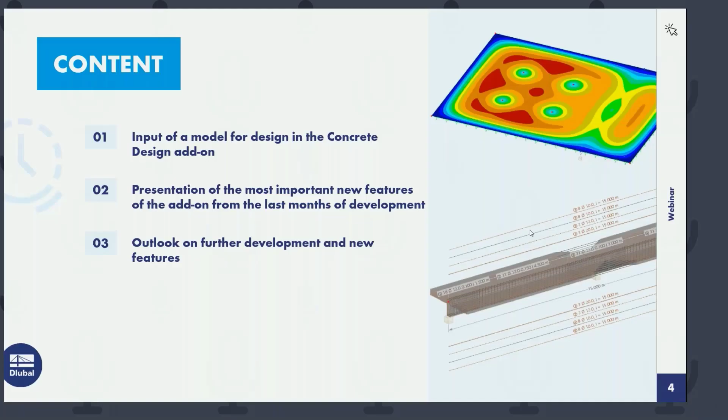Okay, thanks Andreas for the introduction. I will start with a short overview about the content of today's presentation. As I already mentioned, I will show you today new features in our concrete design add-on. Therefore, I will create a small structure in RFEM 6, and during the modeling process, I will tell you about all the new features we now have in our concrete design add-on.

Just a short overview about these new features. Mainly it's the automatic function for surface reinforcement. Then we have also a new function regarding determination of required reinforcement for members, which now also includes the serviceability limit state design. Then I will show you how to design with member representatives. We have also a new multi-edit option in the edit member dialog for members and member sets. If we have entered a reinforcement and we have a certain reinforcement layout inside our member, then we have a new function for printing graphics of this reinforcement template or proposal into the printout report. I will show this to you as well. And I will show you how to activate the design check for the shear joint in the add-on.

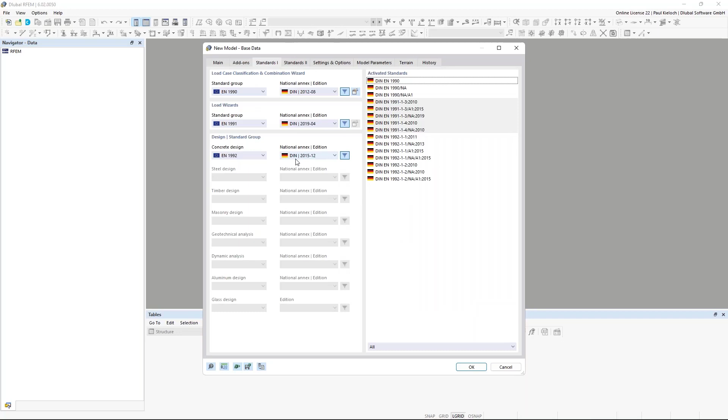Okay, with that said, I would switch directly to RFEM 6. As I mentioned before, I will start with creating a new model. I'm opening a new model file, and what I would like to do today is start with a template. That has the benefit that there are some settings already stored in the template, and also add-ons can be activated, or I could predefine some national annexes and so on. So this is already set in this template, and I will give it the name 'webinar', and maybe 'English' so that's the English one. And I start this file here.

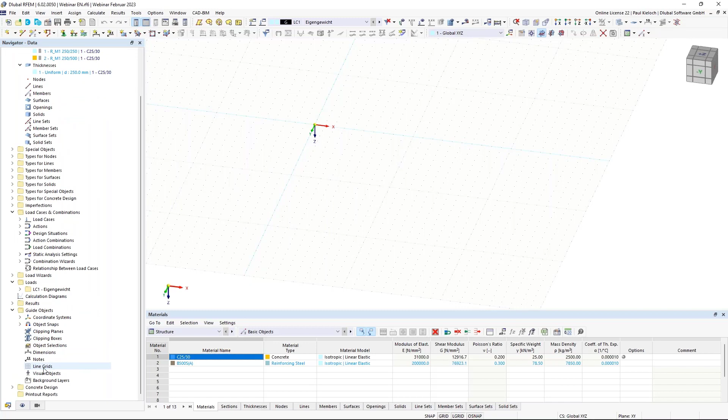As mentioned, due to the fact that I've used these templates, I have a certain amount of materials, sections, thicknesses, and so on, and I will use them today for this presentation. So first, I'm switching to these guide objects, and there I will create a new line grid.

I will also show you today the labels and the dimensions. Switching here to enter the dimensions in X direction: 5 meters and 4 spans. So it looks like this. And in Y direction, the first span is 5 meters, then 2.5 meters and 2 spans, and the last one is again 5 meters. So this is my line grid, which I would like to use today.

It looks like this, and on this line grid I will create my slab, beams, columns and so on. So I can switch off the grid in the background, and then it's a little cleaner if you just see the line grids.

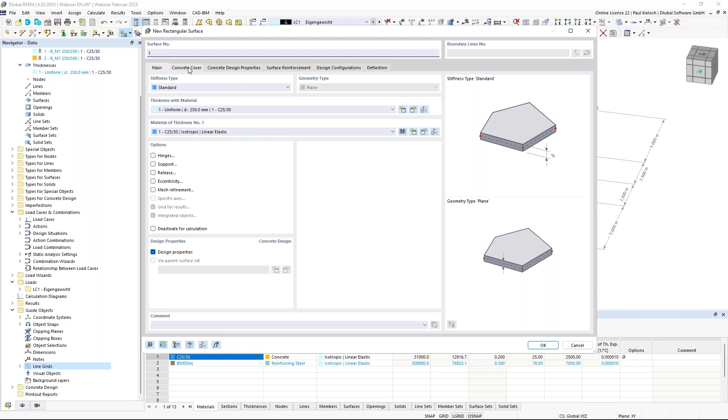The first topic is entering a surface for design. So I'm creating a concrete surface with a thickness of 250 millimeters, and before entering this surface, I can directly set the design properties for this slab. The concrete cover and the concrete durability class, I leave as default here in this example, XC1.

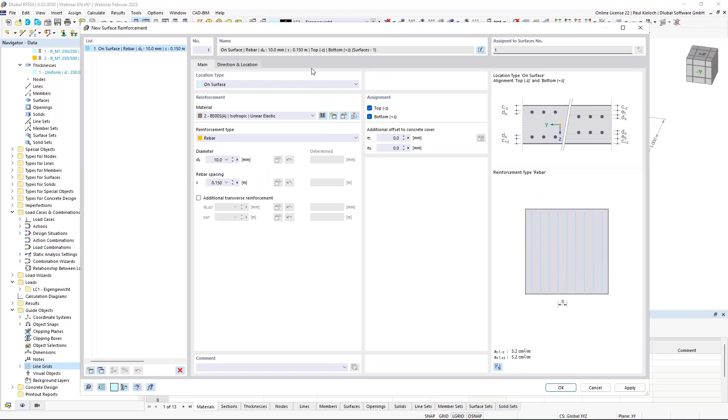The reinforcement direction is also default, and I will assign a basic reinforcement for the whole slab with a diameter of 10 millimeters and a spacing of 15 centimeters in both directions.

You see here already some changes in this dialog, and I will come back to these changes and modifications in this latest version of RFEM 6 later, after the first calculation. Okay, I can confirm this.

The design configurations I leave also by default for this first attempt, and I will come back later to these design configurations.

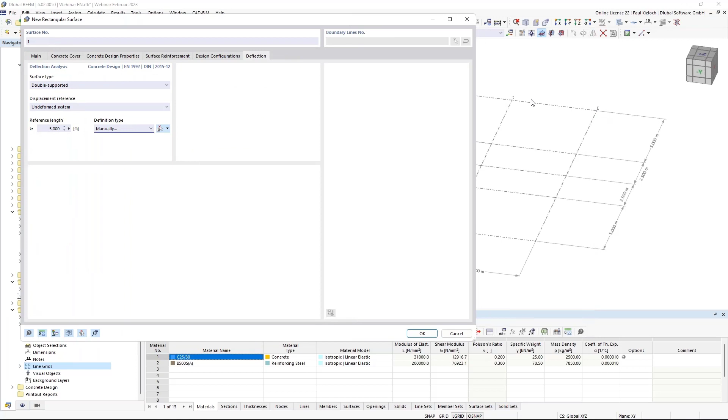The last thing I'm changing here is the reference length for the deflection analysis. So I switch this to manual, and the reference length is now set to 5 meters in X and Y direction. Confirm this OK, and then I create my slab.

By default, you see the rendering of the assigned reinforcement mesh, and what's new now in RFEM in the latest version is the description of the assigned reinforcement.

In the latest version we changed it a little. In the previous versions there was a small arrow downwards or upwards: if downwards, it was reinforcement on the bottom side, if upwards, on the top side of the slab. That was changed a bit, and now it's just a small line next to the text on the downside or upper side. So it's a small change here.

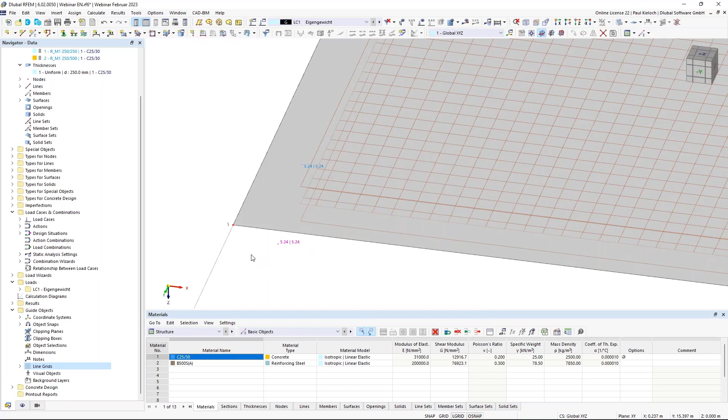What I would like to change here is the number of decimal places for this example. Now I'm switching off this reinforcement just to have a cleaner look on the structure.

The next topic is that I would like to enter a beam, or a rib member, in this axis D. Therefore I create a new member, switch the type to rib, and assign this eccentric cross-section on the positive Z side of the surface, which is the default setting. The used section should be this 250 by 500 millimeter section.

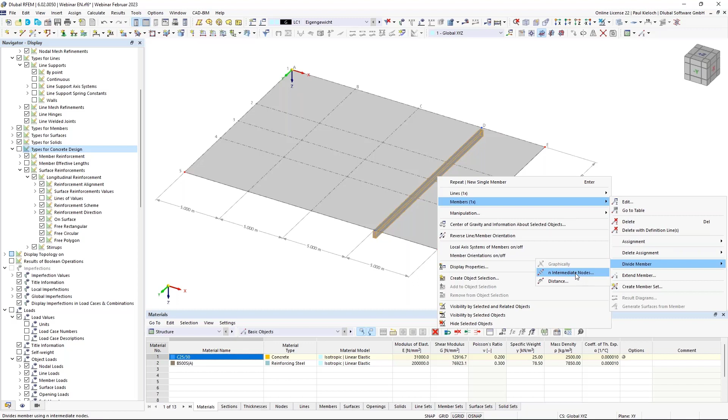Can confirm that is okay, and then I will assign this rib in this axis. And here in axis 3, in the middle of the beam, I would like to support this beam with a column, and therefore I'm dividing this member by one intermediate node.

But what's new in RFEM 6 is that we can use this node type 'on member', which has the benefit that our member is not divided into two parts, making it a little easier for definition of reinforcement and so on. So I will create a new node just with the type on member, without dividing the member.

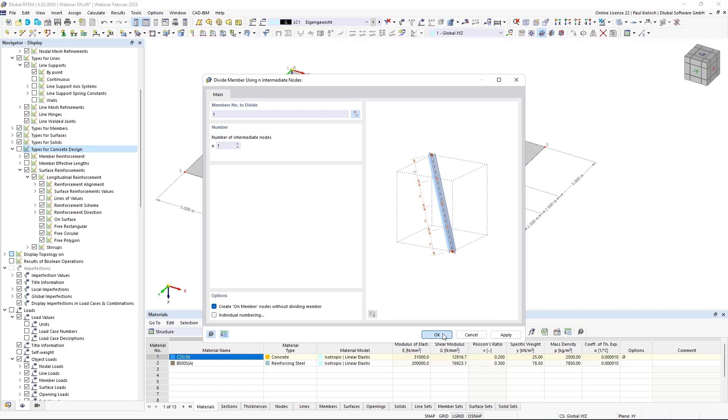You see here in the middle of the beam a blue, light blue node, and that's the new type for dividing members. The next step I would like to do is entering nodes for the column heads, so they are placed here in these points.

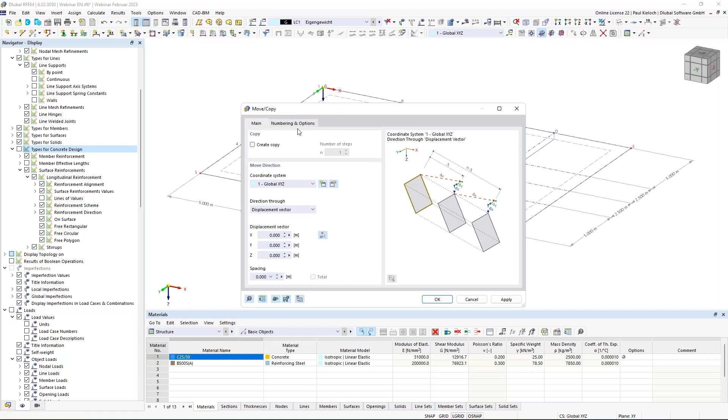Okay, and now I'm switching to the wireframe display model, and I can select these 5 nodes here, and then I will copy them with 3 meters in Z direction, and I can link these steps here and enter automatically a new member. Therefore, I will create a template.

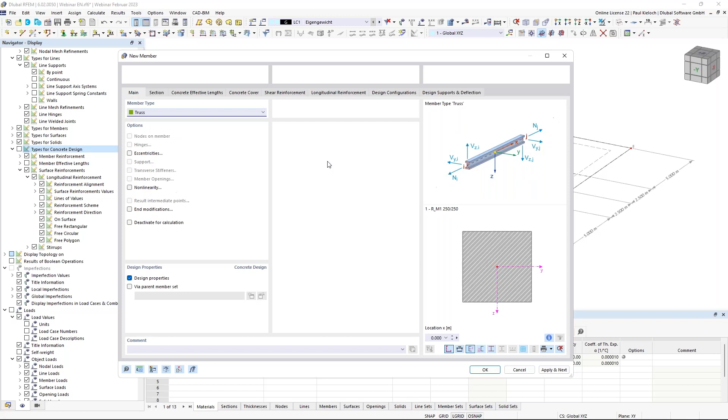The columns should be hinged at the top end and the bottom end, so I'm switching here the member type to truss. The section is pre-selected in this case, like I would like also to use it, with 250 by 250 millimeters. And I can now go through all the settings, all these design properties here, and entering, for example, the buckling lengths for the stability analysis. In my example, it's a braced system, and I would like to use these effective length factors of 1 in both directions.

Next step would be the concrete covering. I leave it here in this example like it is. Regarding the shear force, I would like to use shear links with a thickness or diameter of 10 millimeters and a spacing of 15 centimeters. And the longitudinal reinforcement should be uniform surrounding, 4 rebars and a diameter of 20 millimeters.

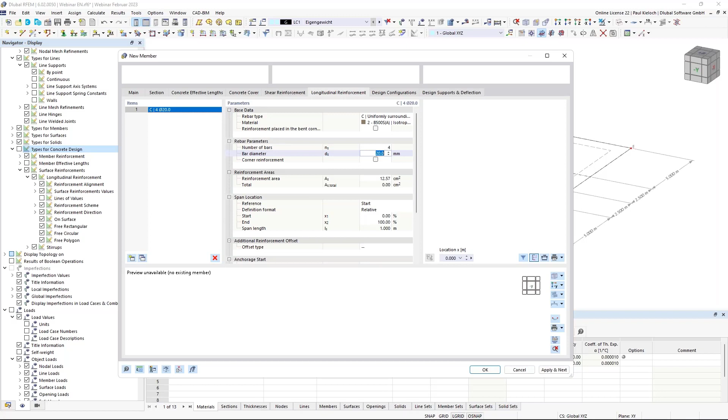Design configuration and design supports are not required to change here in this case, so I can confirm this. And then I'm using the template to create my columns, and they would look like this.

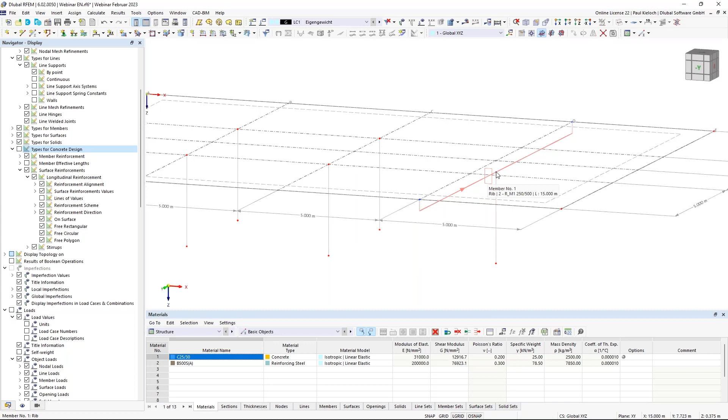I have just to take care because this node is here in the center of this eccentric beam, so the nodes at the bottom end are not in the same height. I will just do a double click here on this node and switch this to 3 meters, and then we have the same level here.

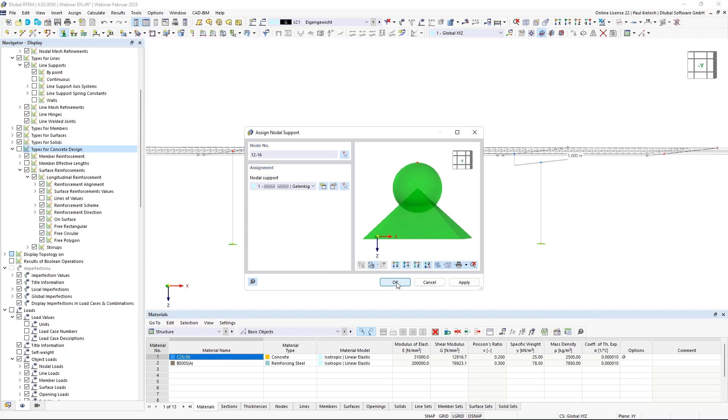Okay, then I can create the supports for these columns due to the fact that I have hinged member ends by this member type. I can create a new nodal support, and this is fixed or rigid in all directions. That would look like this in this example.

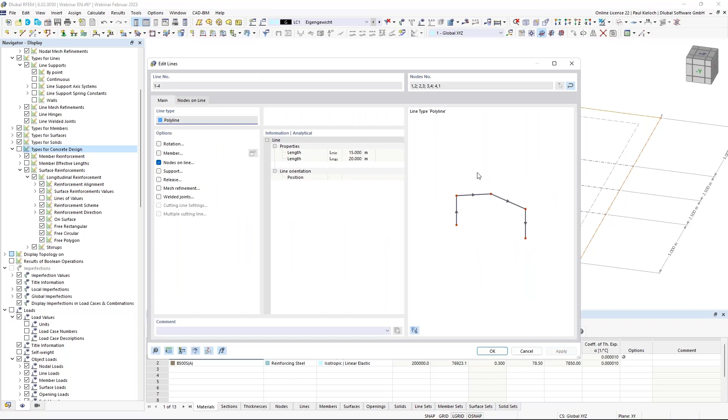Okay, then the next topic would be entering the support at the edge of the slab. So there I would like to consider walls. Therefore, we have also an option in RFEM 6, so I can select all the lines at the edge of the slab, opening them with a double click, and I will assign there a support, create a new one for them, and this one will be changed to local. And as soon as I switch this to local, I'm getting here a new option, stiffness via fictive wall.

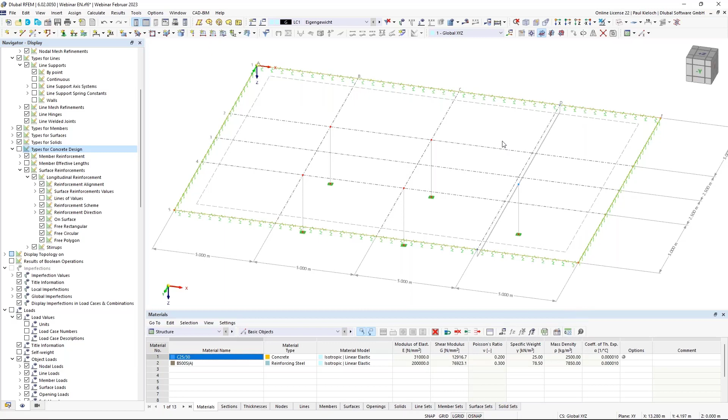And the wall thickness should be 25 centimeters and a height of 3 meters, and it is hinged at the wall head and base. So that's okay for me, I can confirm this. And then I have also the lines on the edge of the slab supported.

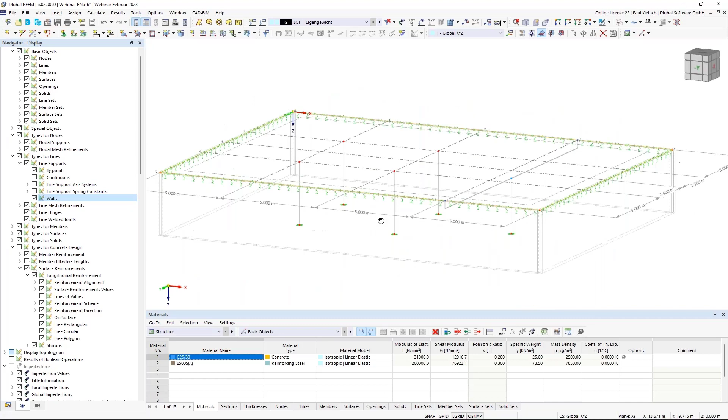If I would like to check this graphically in my system, then I can switch to the view or display navigator. And there under the line supports, I have the option to activate the walls, and then I would see the system also with this fictive walls here.

That is basically my system now. What I have not defined yet is the settings regarding the rib. Therefore, I'm opening the rib member once again, and I switch to this tab here with the rib.

And in this table, you can basically assign the segment length for the determination of the effective width for the ribs. I will not go too much into detail for this part. We have shown this in our first webinar regarding concrete design in November 2021, and it's also part of the Eurocode 2 training where we get more into detail regarding this table.

I will just enter the values here to have a realistic effective width for this example. I'm using here this approach according to Eurocode 2, so I'm setting the segments here, user defined. It's the same on the other side. Basically, I have to do this because I'm using one member which is supported in the middle, and therefore the program needs the reference length.

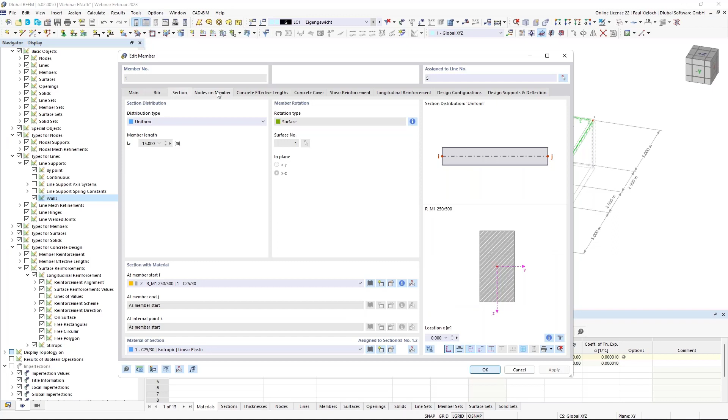So next is the section tab. There I do not have to do any changes, this is okay so far. Concrete covering also, so I can directly switch to the shear reinforcement.

I would like to use here shear links, stirrups with a diameter of 10 millimeters and a spacing of 0.15 meters. And I will not use this for the whole length of the member, but I would like to have a span in the middle of the beam where I have 10 centimeter spacing between the stirrups. So therefore I'm creating new spans.

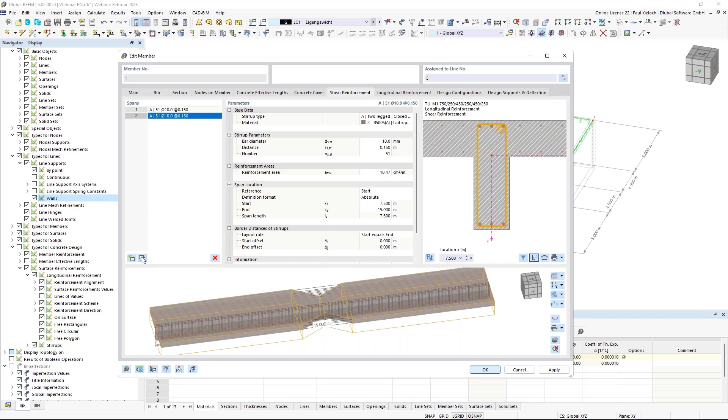I first switch here to absolute for the definition of the span length. Then I just click two times on this button, and then I'm getting here this spans. If I zoom in a little bit, then you see that here this middle span is now a little bit displaced and not in the middle of the member.

And I can change this here to 6 meters, and in the second X location to 9 meters in my example. And then the span is in the middle of the beam. And I can change this to 0.1 meters, or 10 centimeter spacing. Okay, that's my shear reinforcement I would like to use today.

And then I'm switching to the longitudinal reinforcement. By default, the reinforcement is using here 3 rebars at the top side and on the bottom side. I will change it to 4 rebars.

And then you find also here the rebars from the surface reinforcement, which is automatically also assigned to the flanges of the rib member. If you do not want to assign these surface reinforcement here, then you can switch it off via this button, but I will leave it on here for this example. Last thing I would like to add here is an additional reinforcement here on the sides of the web.

So therefore I'm creating a new item, and this one is a uniform surrounding for my example here. Uniform surrounding, and 6 rebars with a diameter of 12 millimeters.

Now, if you have entered the shear reinforcement or the longitudinal reinforcement like this, and you would like to print a graphic of this definition into the printout report, there is also a new feature. You can click on this button here, and then you get a new dialog called reinforcement layout. And in this dialog, we have here a new button, a new function, and there you can print the graphic here directly into, for example, a printout report or 3D PDF, or a graphic as a file.

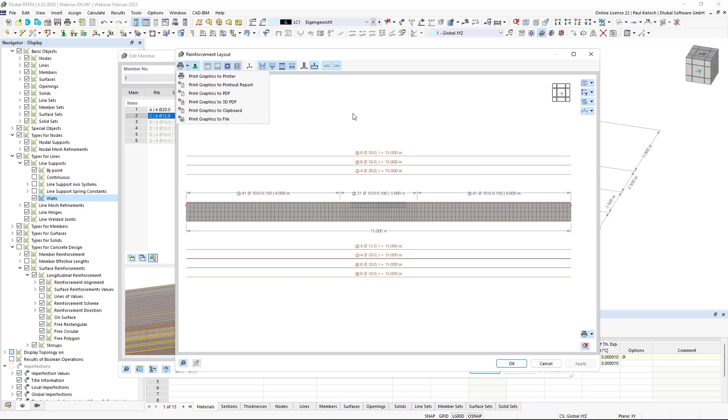So it's not a CAD file, it's a picture file. So you have this option, basically the same like for printing a graphic, a regular graphic, into the printout report. So that's also a new feature in the add-on.

Okay, then I'm switching to the tab with the design configurations. There we have the ultimate configuration and the serviceability configuration. And in both configurations, we have now 2 new features, or in every configuration, we have 1 new feature. If I'm switching to the ultimate configuration, then you can see here this shear joint, and that is what I have activated before in this tab with the rib.

So in general, there is always the shear joint design check activated, and there you find further settings, for example, how the program determines the shear stress in the joint, or you can also activate here design of flange connection on segmented cross section. So if you would like to perform these design checks, then you can check it on here in this ultimate configuration. So just keep in mind, this is always active, but you also have to take care here whether you have activated the shear joint in the individual members.

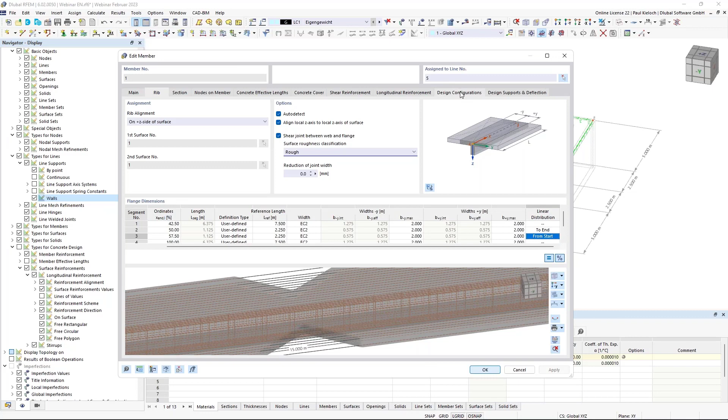The next new feature is inside the serviceability configuration. So inside the serviceability configuration for the members, you find here a new option, determination of longitudinal reinforcement for members.

We have implemented this at the end of last year, and now it's possible, if you check this option on, to consider also the parts from serviceability limit state in the result diagrams for the required reinforcement. In older versions of RFEM 6, only the ultimate limit state was considered in the diagrams for the required reinforcement. By activating this option, the diagram will also consider the parts from the serviceability limit state.

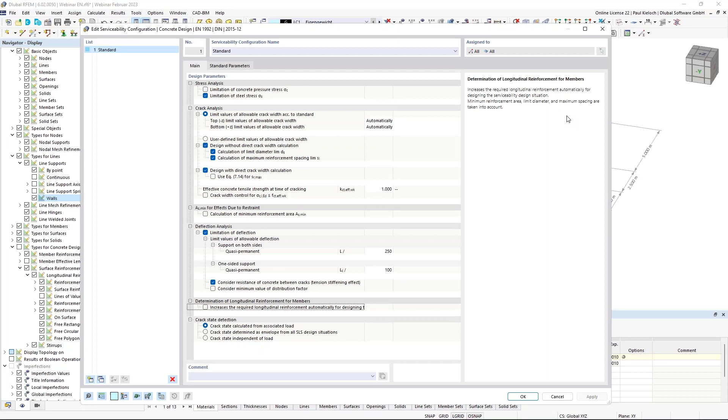If you click on this here, you get a little tooltip, and there you see that currently this option considers the requirement for the minimum longitudinal reinforcement, the design check for the limit diameter, or the maximum spacing. So the direct crack width calculation is currently not implemented.

That's so far regarding the new features in the configurations. One last topic I have to enter here is the design supports.

In concrete design, we are checking the deflection in Z direction, so I'm switching here over the local Z axis. If I zoom out a little bit, you see that the member length is 15 meters. This dialog basically does not know that we have a column in the middle of the member, so the reference length would be by default the total member length, and for the deflection analysis that would not be okay in this case.

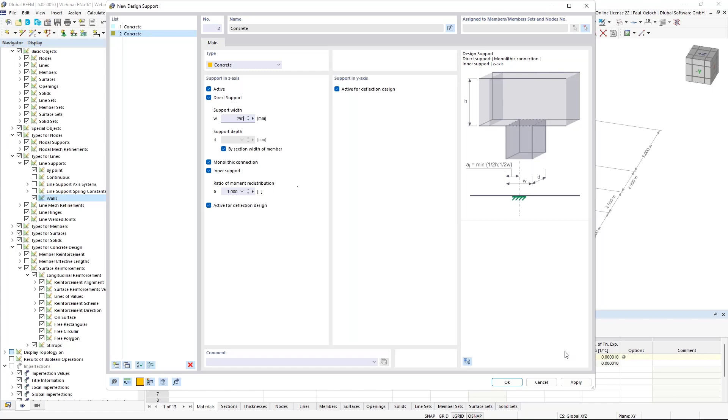So I have to enter design supports to consider this correctly. I'm creating a new one, monolithical, with a width of 250 millimeters in my example. That will be assigned at the start and end of the beam, and then we have also one here in the middle, which is an inner support, also 250. As soon as I assign these design supports to this internal node, you see that we have two spans here, each with 7.5 meters.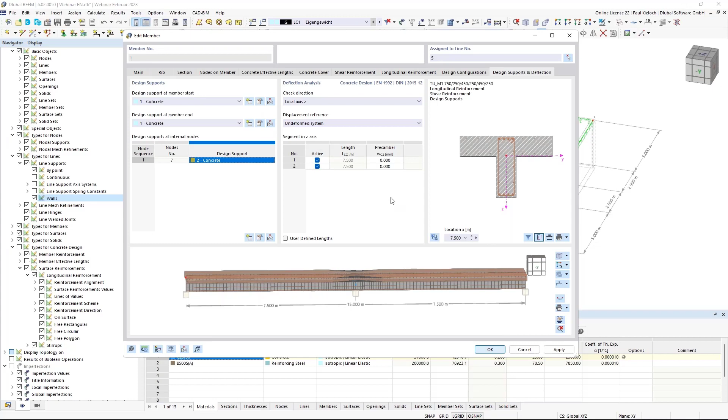We have defined our reinforcement for the member, and the next topic I would like to enter here with the structure is a FE mesh refinement.

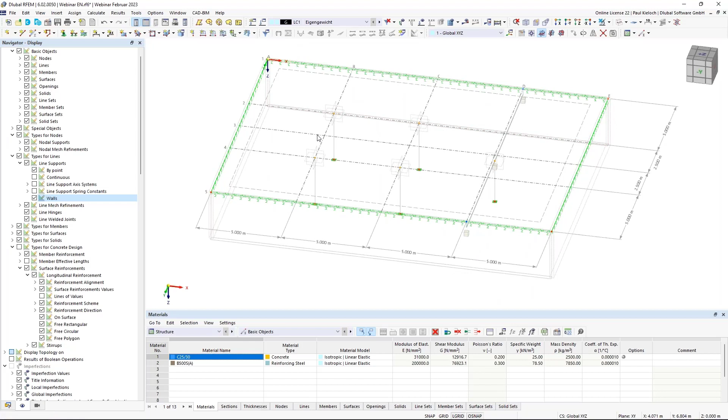I would like to assign the FE mesh refinement on these nodes, so I'm selecting them, double-click FE mesh refinement, and create a new one that should be rectangle in my case, using an inner length of 7.5 centimeters. Okay, so it looks like this.

Now that I've assigned a mesh refinement, I can also use in this situation a surface result adjustment to use average values of the surface internal forces. So I'm going to the special objects, and there you find the surface result adjustments.

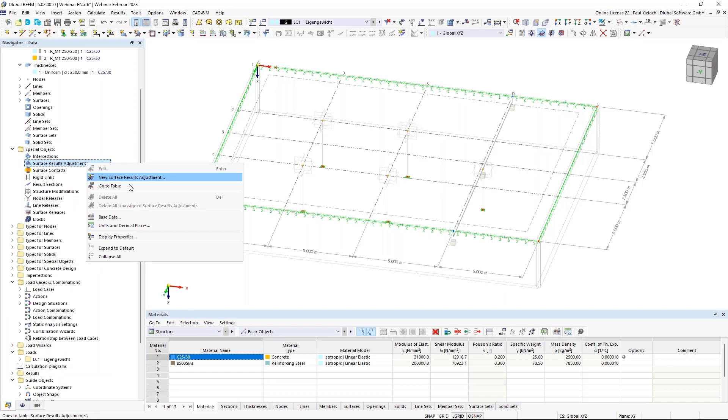So I create a new one for the surface. I will use dimensions in A and B direction, with 0.75 meters in both directions. And with this button, I can set the first location.

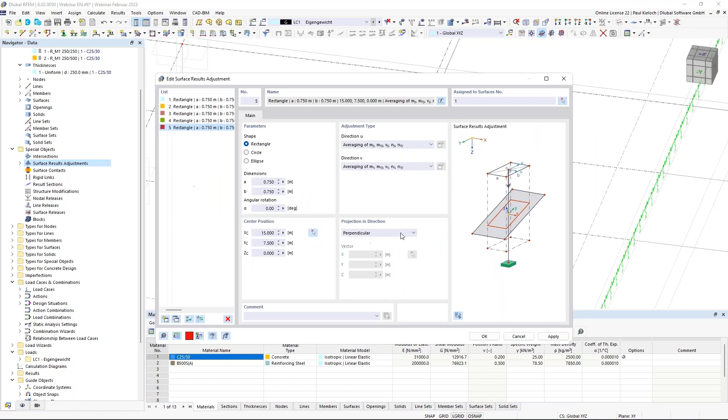Then if I click on apply, I can just show you where this is located now. I'm using this button here for copying this assigned surface result adjustment, and then it's pretty easy to create them, just clicking on copy and switching the location. It goes like this, and here. Okay, and if I click on apply, then you see them here in my file.

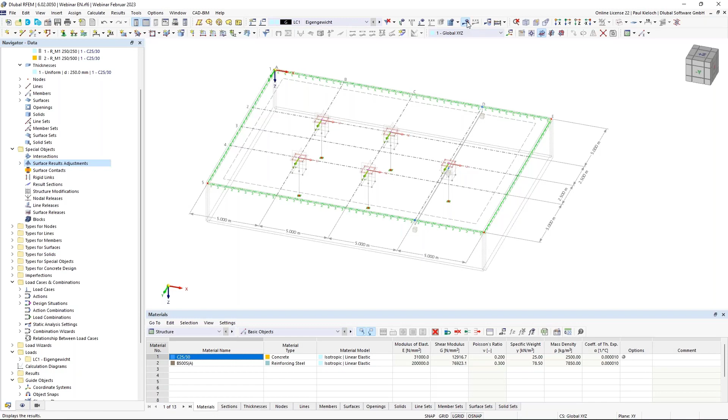The next step would be to enter the loading. But before doing this, I just want to check whether my structure is correctly entered, whether there might be some problems regarding the FE mesh and so on. So I would just calculate the first load case here. Yeah, that looks okay, everything seems to be connected properly.

Now I can also show you, if I switch here to the internal forces of the surfaces, how the surface result adjustments are working here. Yeah, so everything seems to work.

Now I can switch off the results and the FE mesh, and I can also switch off the surface result adjustments, which are the result objects. I'm also switching off, under type for nodes, the nodal mesh refinements, so I have a cleaner look on the file.

Now I can start with entering the load. At first I need some new load cases for this situation. My first load case will be the load case for the self-weight, I'll call it DL for dead load. Then I will create a new one here for live load, and I'm using this category.

And I'm copying this, so this one is live load 2, this one is live load 3, and this one is live load 4. Okay, apply.

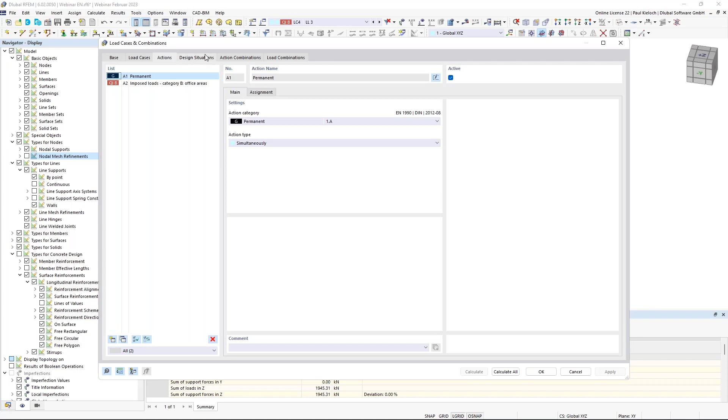The actions are okay in this example. I'm switching to the design situations. The design situation serviceability limit state frequent is not required here in my example, so I can delete this one, and I will do the design checks just with the characteristic and quasi-permanent design situations.

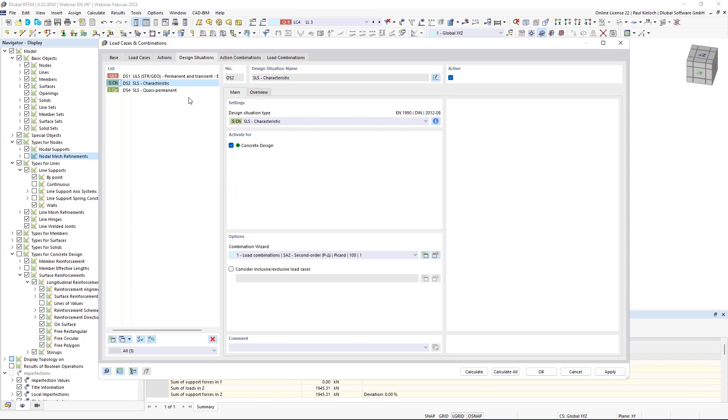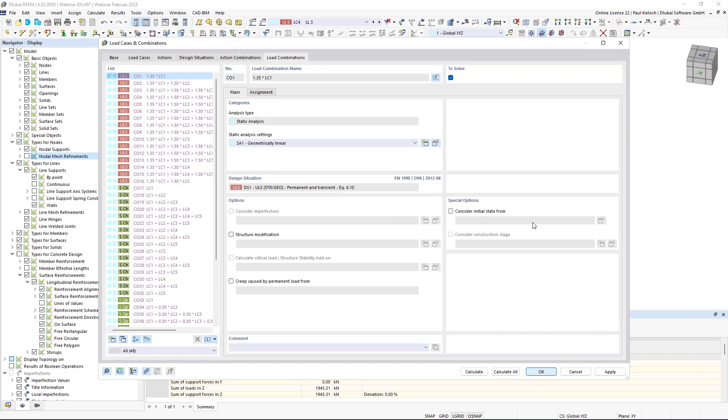One change is that I will create load combinations according to first order analysis, so I'm switching that here and switching to the action combinations, and then if I click on this tab, I will get the result combinations, and they are all according to first order analysis. Okay, that are my load combinations for this example, and now I can start filling these load cases with loads.

So the first load case, dead load, will have 1.5 kilonewton per square meter on surface number 1, and it looks like this.

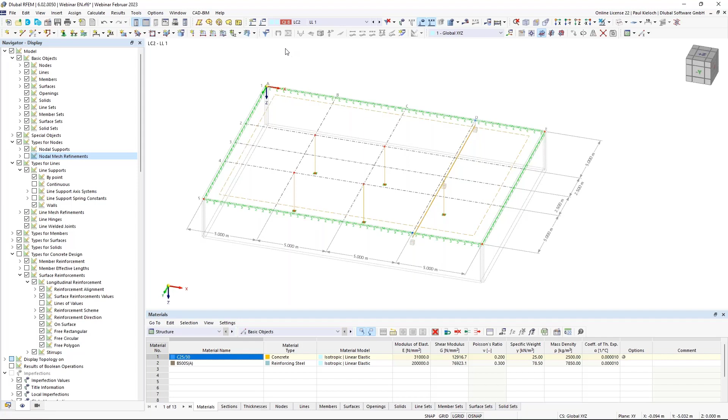Here in the second load case, it's now a little bit more problematic. For the live load, I would like to use a loading pattern according to this grid, to these fields here. Currently, we do not have a load wizard for this, so I will create the loading pattern by using free surface loads, rectangular loads, and polygon loads.

For this situation here, so I'm in my load case 2, and I will create a rectangular load on surface number 1. The load value is here in my example 3.8 kilonewton per square meter, and the location here is from that point to that point. And I can click on apply next, and then I see here the load in this field. And now I'm just entering the surface and switching the location once again. Looks like this. Apply next. Surface 1 and here on this point.

And okay, so in this situation here and in this situation, it's a little bit more complicated. So I cannot use the rectangle. I will use the polygon load here. It's also assigned to surface number 1. And then from this point to that one, and that one, confirm is okay. The load value is also 3.8.

Okay, and then I need this function once again, now from here to these nodes, okay. And it looks like this.

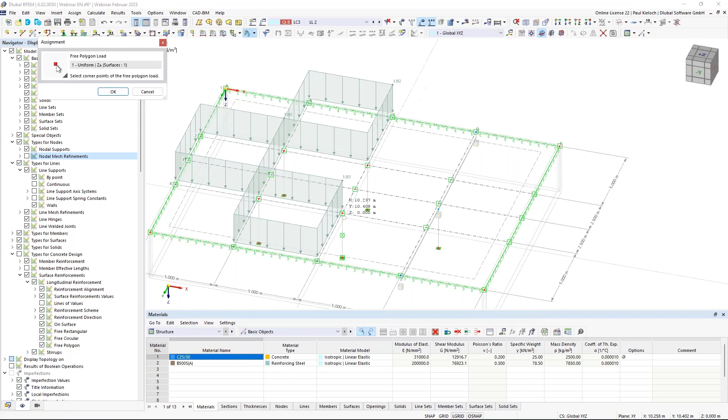Here and okay, and then I'm switching to this polygon load here, from that point to that and that point. Okay, 3.8. Okay.

For the live load 3, I'm using the rectangle again. Surface number 1, 3.8 kilonewton per square meter, and it's from here to here. And then I can click also here apply next, and then I can switch here the load case in this dialog, assign it to surface number 1 again, and switch the nodes, and then it would look like this.

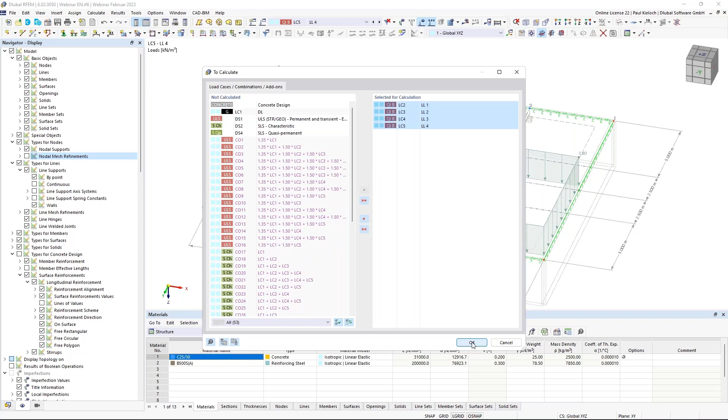If I'm entering these loads like this, then I'm always starting a short calculation process. I'm going to calculate. I'm just selecting the load cases where I have assigned these loads. Start the calculation.

And now what I'm always doing here is I'm switching on the load distribution here in RFEM. I'm switching off the load itself, but just for the 2D elements. So now I can switch to all load cases and just check whether the loads were applied correctly. So I have here my 3.8 kilonewton per square meter, so I can directly control the loading pattern here. Okay, that looks okay so far.

So we have entered our combinations and also our loading, and now I can basically start with the first calculation for the concrete design add-on.

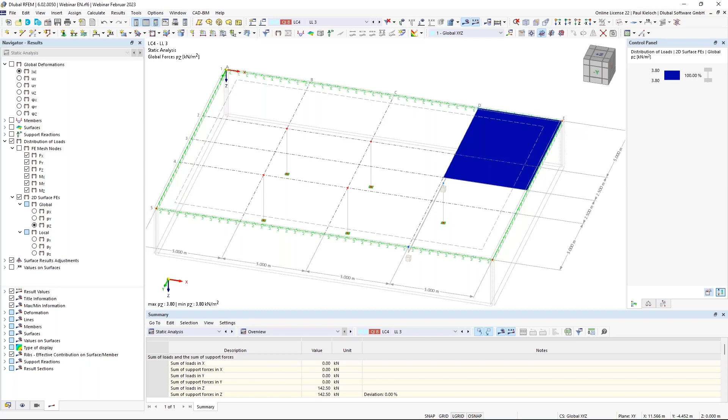Therefore, I'm switching here in the table to the add-on concrete design, and by default all objects are activated here, but I will do the first attempt here just for surface number 1. And then I'm starting the calculation.

It takes a moment, and then the program will show us the design checks for surface number 1, and we can check the design ratios at first for the ultimate limit state. And then we can check where we have to enter additional reinforcement.

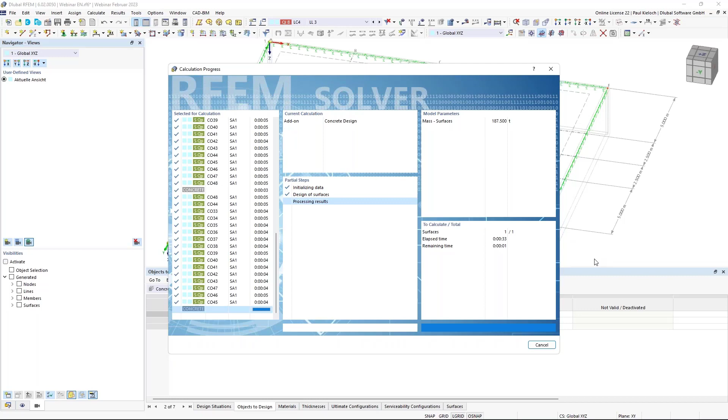Okay, so basically if you do surface design, this dialog will in most cases look like this or similar. You have several points where it's not designable, or you have not designable nodes. Therefore, I would switch over here to design checks on surfaces.

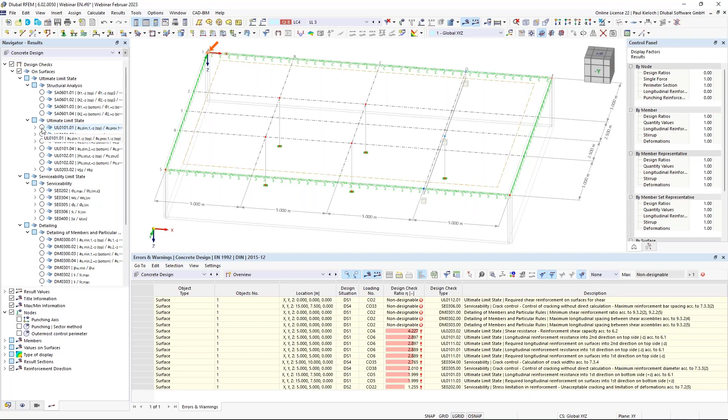In my case, I would like to check it, for example, for the top side in direction 1. And then it looks like this, that especially over the columns, I have elements where my design checks are not fulfilled. Here you see it's a range from 1 to almost 3 times not fulfilled design checks. That's the same also in the other direction. On the bottom side, it looks a little bit better, but there's also a small problem in this area. So if I have this result diagram in this way, then I can also switch to the reinforcement.

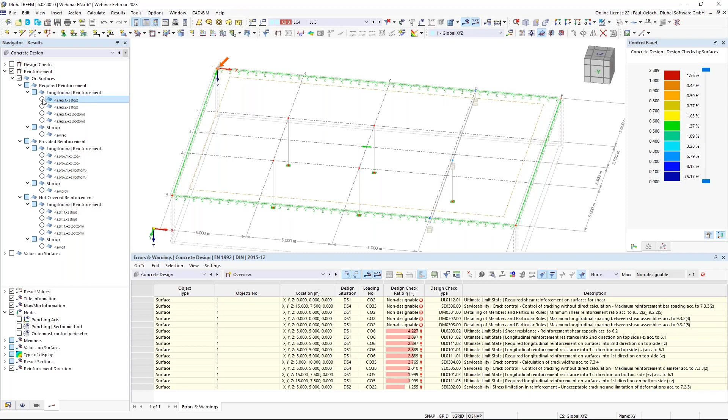On the reinforcement, I can switch on the required longitudinal reinforcement on the top side, and then I see these values here. One more informative graphic would maybe be switching over to...

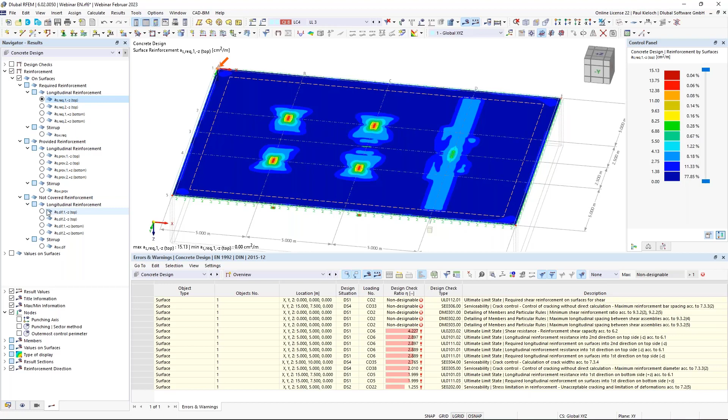...not covered reinforcement. We have assigned here a basic reinforcement of 5.24 square centimeters per meter, and now it would be interesting where I have to assign additional reinforcement, and therefore I'm switching over to this not covered reinforcement. That is, like I said before, basically over the columns, and here in the middle of the beam there's also one area where I would need additional reinforcement.

Now if I'm entering additional reinforcements, there we have a new feature, and therefore I'm switching here in the data navigator to the types for concrete design, surface reinforcement, and I create a new surface reinforcement. This new surface reinforcement will be also assigned to surface number 1, but now not on the total surface, but it will be changed here to a free rectangular location type.

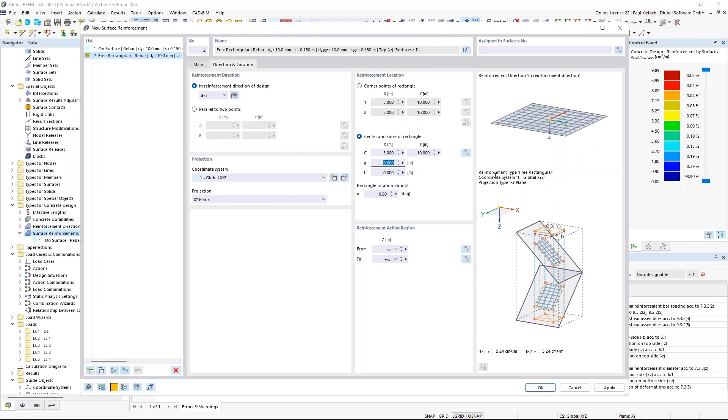The first additional reinforcement, I will assign just on the top side, and I will enter an additional offset of 20 millimeters here. I will use this additional reinforcement in both directions, and the location will be here, for example, on this point, and the dimensions are 2 by 2 meters.

And just clicking here on apply. No, not yet, so we'll enter it once again. Millimeters, okay. On this point, and 2 by 2 meters, okay.

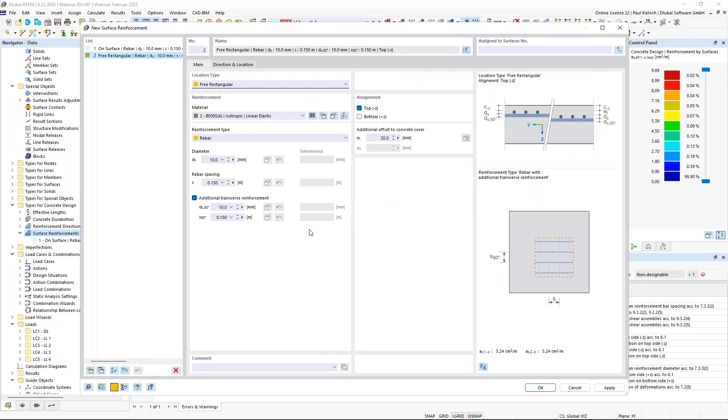As I said before, there is now a new option here regarding determined buttons to overtake a determined value. These buttons are required for a new function in RFEM 6, and you can find this new function if you click here on this button. Once in the diameter, it's called auto, and also in the spacing.

So what you can do here now is assign an additional reinforcement which covers automatically the not covered reinforcement from the first calculation. In my case, I'm needing here an additional reinforcement of around 10 square centimeters per meter, and I can say that I would like to use rebars in both directions with 12 millimeters.

The spacing between the rebars should be determined automatically. If I'm selecting auto, the program shows me additional parameters, the minimum spacing and the maximum spacing defined here. So I will use 10 centimeters as minimum and 30 as maximum, and confirm this with OK. It's the same in this other direction. OK, I click on apply.

So the next step is that I'm copying this one here. Copy, and I just change the location. That is basically the same as I have done before with the surface result adjustments. This one, and OK. And the last one will be here.

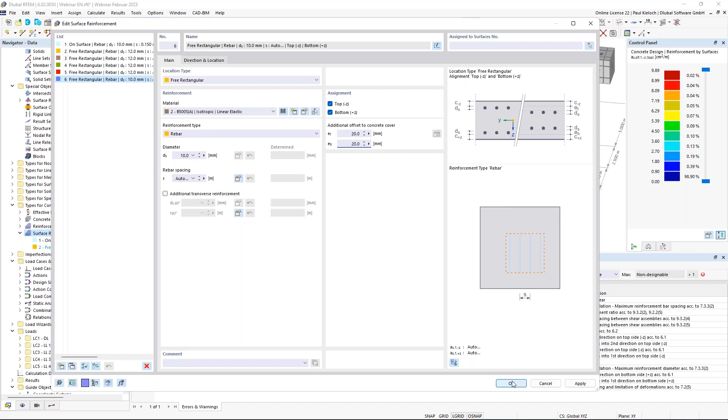OK, and the last one is just in direction 1. I will use 10 millimeters here, but this time on the top and bottom side, this way. Also auto, OK, I can click on OK. And it looks like this.

So now I have just gone to concrete design. OK, results, just delete the results here. And now, due to the definition of this slab, due to the definition of this additional reinforcement here, I've just forgotten to assign this to surface number 1.

That was the problem. OK, now it's assigned, and if I switch the display setting on, then you see here on these slabs this additional reinforcement. It looks like this. And due to the fact that we now in this state do not know which value is assigned, we just have the info that it's auto reinforcement. So with these settings, I can start the calculation once again.

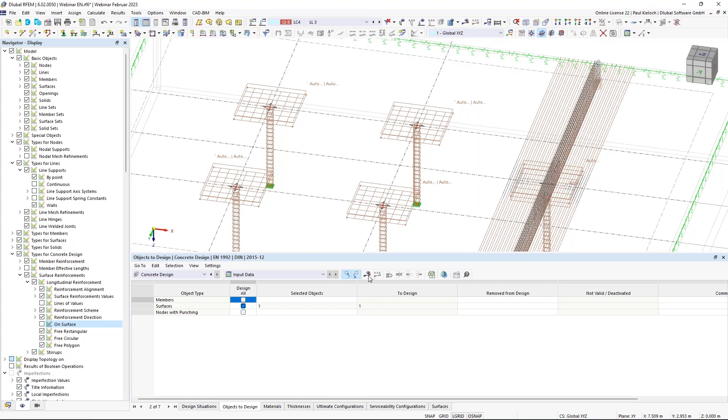And now the program will cover all the not covered reinforcement automatically, and the result will be that I'm getting info about the spacing I have to use if I assign, for example, a diameter of 12 millimeter or 10 millimeter and so on. Maybe one point I have not mentioned yet is that you cannot assign the auto function in diameter and spacing at the same time, so that is not possible. You have to use either the automatic function for the diameter or the spacing.

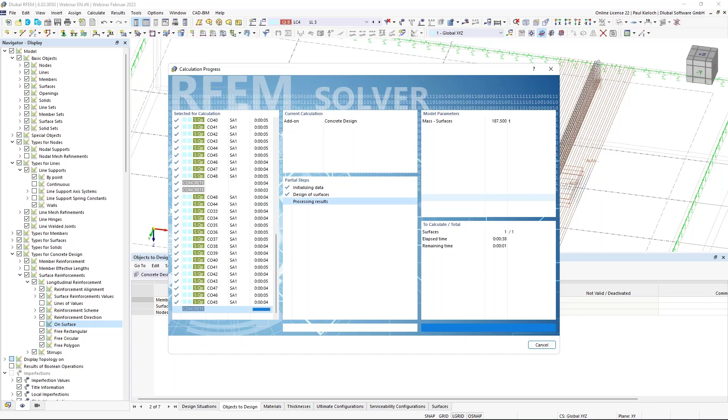Okay, just wait a moment. And now it looks like this. So what you see now here is we are still in the results with the not covered reinforcement. So you see now here that the not covered reinforcement is now 0 here. It's just, if I'm switching over here, one small part, it's 0.7 square centimeters, so I will neglect it here for this part. But on the other sides, it's also everything covered.

And now you see here the info with the required or assigned additional reinforcement, so the value in square centimeters per meter. And if you would like to see the spacing, then you have one option. You can go to the reinforcement on surfaces and to the tab here in the table surface reinforcement. And if you click on one item, then this line or this item here also in the table will be highlighted. In this case, I see that I have to assign at least additional reinforcement of 12 millimeter and a spacing of 11.

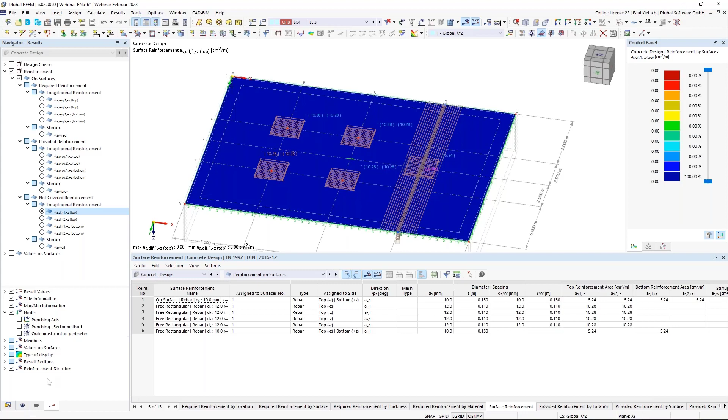So maybe you think that a spacing of 11 centimeters is not so practical, so you can also use other values. If I'm opening the dialog for edit reinforcement once again, you have two options basically. One would be that before you start the auto process, you can switch the increment in this additional parameter settings so that you, for example, use just 5 centimeters. That would be an option. But you can also use now this determined value here and overtake it in this cell, and then edit it. So I could overtake this value and modify it, for example, to 10 centimeters. That's one option using this button here.

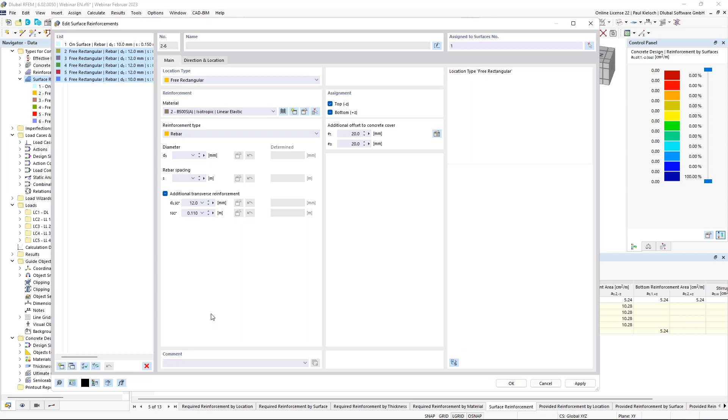It's also possible to select all items here which have this auto setting. And then you can use the same button here at the bottom end, and then the program uses the automatically determined values here.

Okay. I can assign this one, and I will delete the values just for concrete design. And before I'm starting the next calculation process, I will continue with the columns.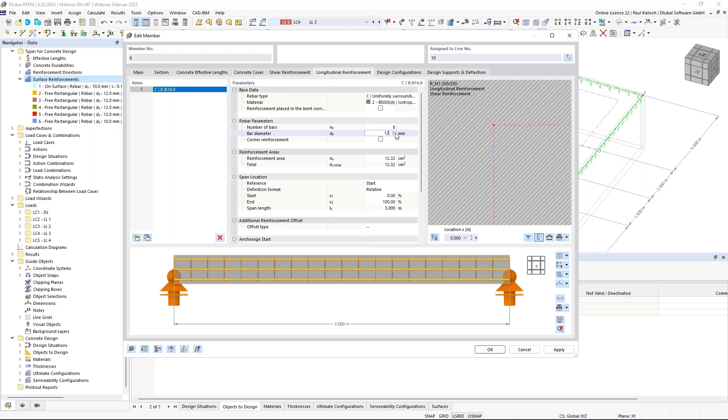So for the columns, I will show you two new features. One would be regarding the multi-edit. In case you have a member with a different type of reinforcement layout. Let's say, for example, in this member, I would assign 8 rebars with a diameter of 12 millimeter. It would look like this. So here we have our 4 rebars with 14, and here 8 with 12 millimeters.

In the previous versions, we had the limitation that if you had different reinforcement proposals, then it was not possible to do changes here in the shear reinforcement and longitudinal reinforcement. That is also solved now, this little downside, because now it's also possible to show here members with different settings.

So you see, for example, that we have here the same rebar type, uniform surrounding, but here we have a different number of bars, so from 4 to 8, and also different spacing. And here in this dialogue, there is basically a certain member displayed of the selection. So if you would like to see another member, then you can switch here with this option between the members, and then you would see the rendering for the selected member here.

What I can now do here with this new function is put several different members into one selection and change the reinforcement for all these members in one step. So I would set it back to 4 rebars with 14 millimeters, and then it's the same for both, and I will get also the name or the description of the item back, because it's clear the amount of rebars and the diameter. Okay.

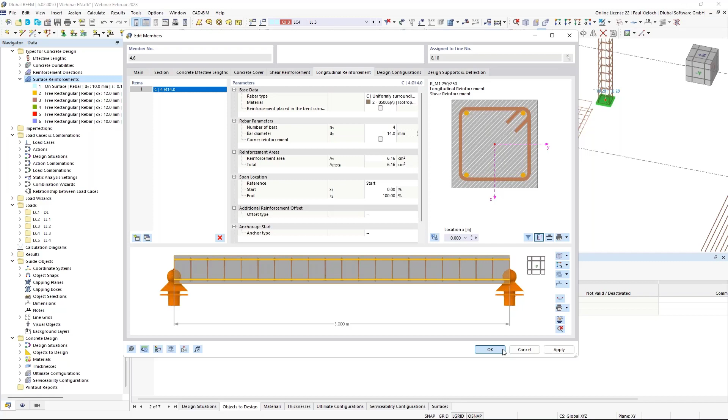That's basically regarding the multi-edit. So you have this multi-edit for the shear reinforcement and also for the longitudinal reinforcement. In my case, it's also the same length, but it's also possible to use this multi-edit if the lengths of the members differ.

So the next feature or option I would like to show you is using member representatives for the design in the concrete design add-on. Therefore, I will create types of columns. So let's say you have a lot of columns in your structure and you would do the calculation with different types. Then you can create, for example, here...

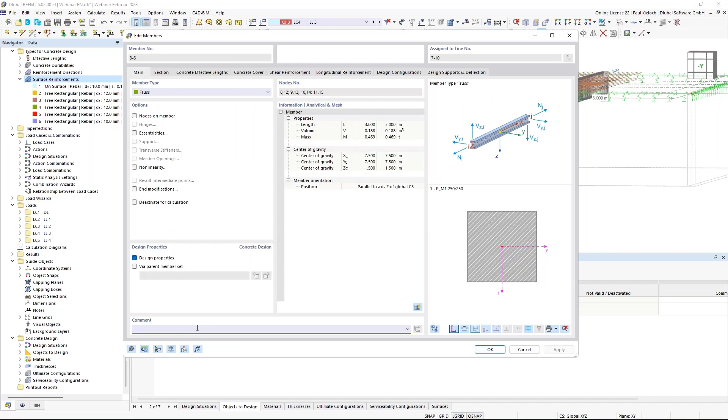or not create, but enter here a comment. Let's say in my case, type 1 column, type 1, this one. And the other 4, I would add a comment and say type 2, for example.

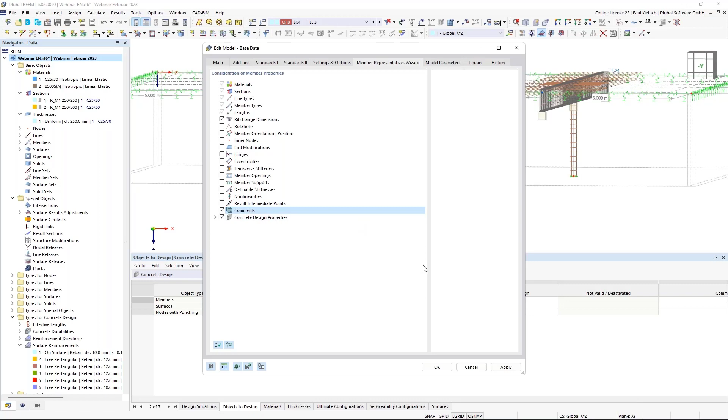So the next step would be to activate the member representatives in the base data dialog here. If you switch on or activate this member representative wizard, then you have the option to also consider these comments. So I'm activating these comments here. And then if I click on OK, I'm getting these member representatives.

So we have one member representative with the blue bubbles here, and one with the green one. I can do a double click on it, and directly switch the name in the type 1 column, apply, and this one maybe to type 2. It's not required to change it, but it maybe helps you afterwards in documentation, because you can create printout reports and tables including the name, making it easier to document results for the individual types.

So what you now see is that if you're working with these member representatives, you can also assign shear reinforcement, longitudinal reinforcement, and in general set all the design properties by using the member representatives. I'm confirming this with OK. And now you see here in the table with the input data, these member representatives.

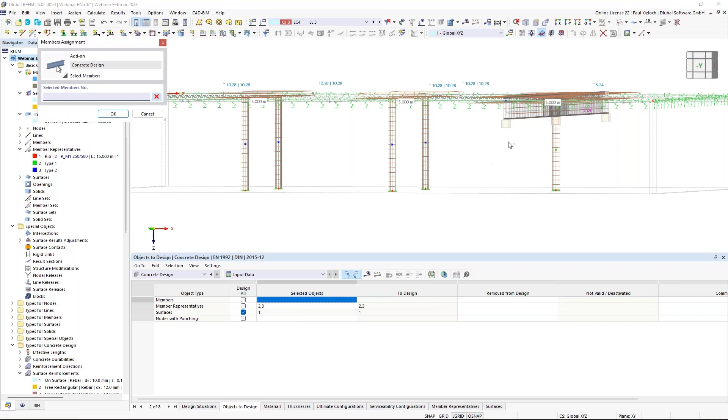In my example, I would like to do the design just for the type 2 and type 1 column. I will do the design for this member here. OK, and then I will activate all my punching points here in the table, but I have to activate them also here in the structure, so this one and this one. It's for nodes, and I will activate the punching design check.

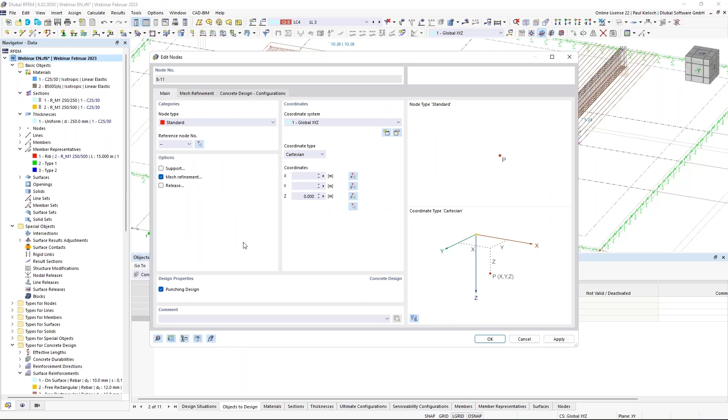And in the configuration for punching, I'm switching on this option that I would like to use the provided longitudinal reinforcement. As I said before, I used this auto function to create additional reinforcement, and I will now also use this provided additional longitudinal reinforcement for the determination of the punching shear capacity.

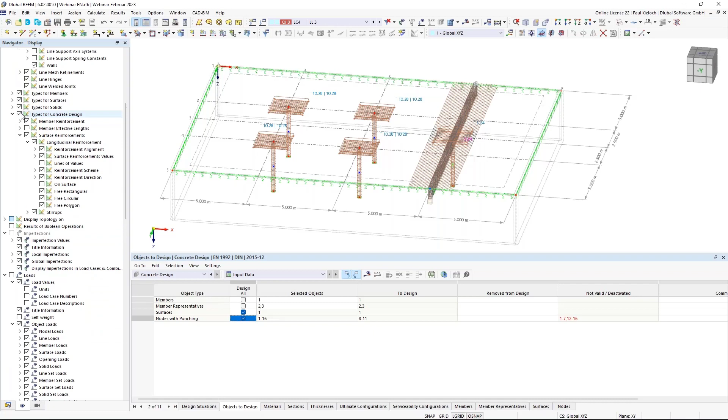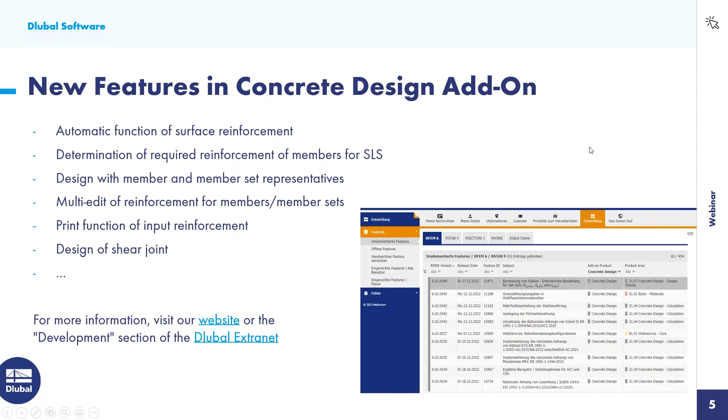That's basically all. I can now just save this file, and then we can start the calculation for the whole structure, but I will switch off the types for concrete design, and then start the calculation process. In the meantime, I'm switching over to the presentation to give you a brief overview about the upcoming new features in our add-on for concrete design in RFEM 6.

And that is a random list, so it does not mean that the first mentioned feature will be released first. It's just randomly listed.

So the same determination of required reinforcement like I've shown you for the members, with the option in the SLS configuration, we are also developing the same option for surfaces. Then nonlinear calculation is also in development for ultimate limit state and serviceability limit state for slabs and members or beams.

Then one upcoming feature is also the merge of shear and punching shear resistance and reinforcement design checks and reinforcement into one graphic. Then, of course, fire resistance design checks, and seismic design of concrete components according to Eurocode 8.

Then we are developing an interface between RSECTION and RFEM 6, also to have the option to reinforce general massive cross-sections in RSECTION, not just in terms of longitudinal reinforcement, but also regarding stirrups. So you will be able in future to create free-form stirrups in RSECTION and then import this cross-section to RFEM 6 and do the design check there.

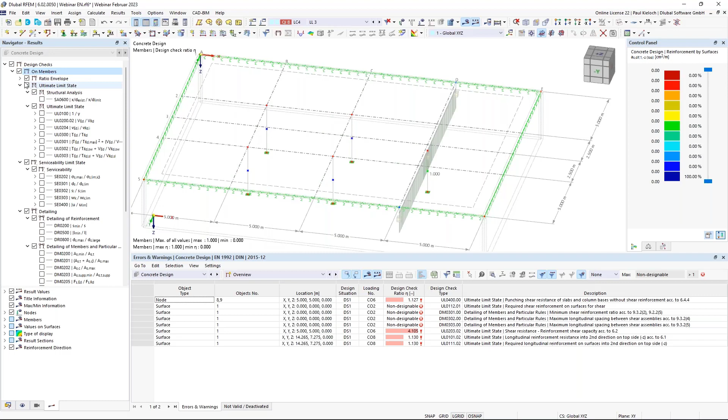I will switch now over to RFEM, and we can just do a quick overview of the results, because there we have also some new features, just one for the members. So I have done here the design on the member here.

Just for this rib, I've used one member here. If I switch over and show you the design check for the shear force, since some version we've extended the amount of intermediate results, so it's a bit more detailed now than in previous versions. You just click on this small arrow here, and then you get more detailed results.

Here you see the results for the new features regarding the shear joint. That's all listed in the design checks for the members.

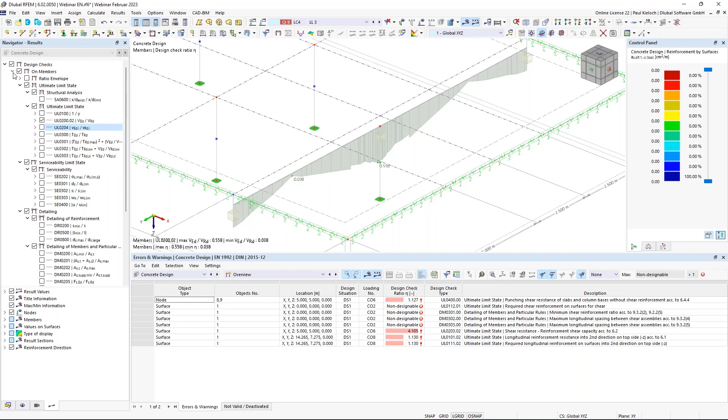If I switch over to the member representatives, that's basically the same, but what I'd like to show you is that if you do the design in the add-on with member representatives, you get the same result for each individual member representative. So I have 4 columns here, and all 4 columns have the same results.

If you would like individual results for the individual columns, you can use the representative for input, but you have to design the individual members, not the member representatives.

Regarding the surfaces, we checked the results before. I'd like to show you one last new feature regarding punching: in the latest version we've implemented this load increasing factor beta, which is now also possible to activate in this detailed result. So under the design checks on nodes, you find this load increasing factor beta.

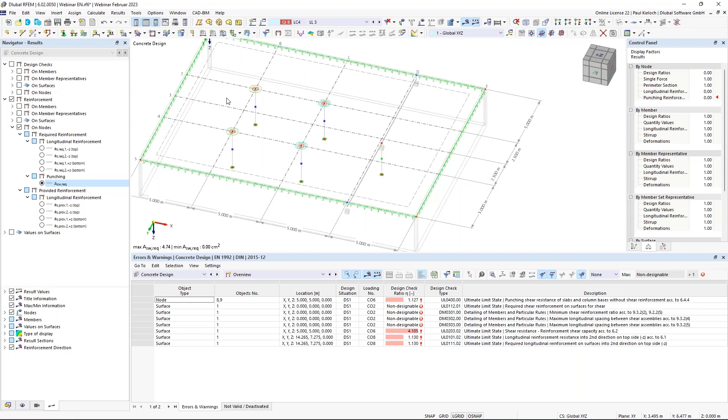If I switch over to the reinforcement, then to the reinforcement on nodes, and if you have activated the required punching reinforcement here, you can click on isolines and, by activating values on surfaces, you get the individual amount of required punching reinforcement in the individual perimeters.

And now, the last feature I'd like to show you: you have the option in the nodes to also display the outermost control perimeter. That's also connected to the feature I mentioned before in the presentation, that we plan to combine the results of the design check for shear force in the slab and punching shear above these columns.

Okay, those are basically the mentioned new features in RFEM 6 and its add-on concrete design. And with that, I'll hand the screen back to Andreas.